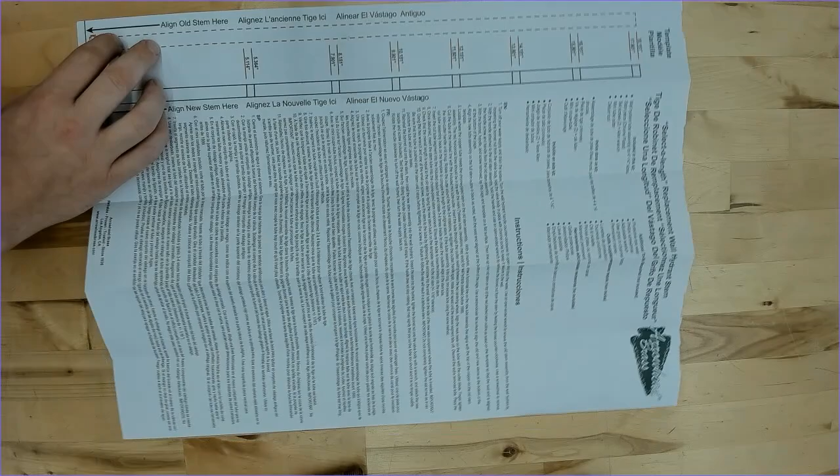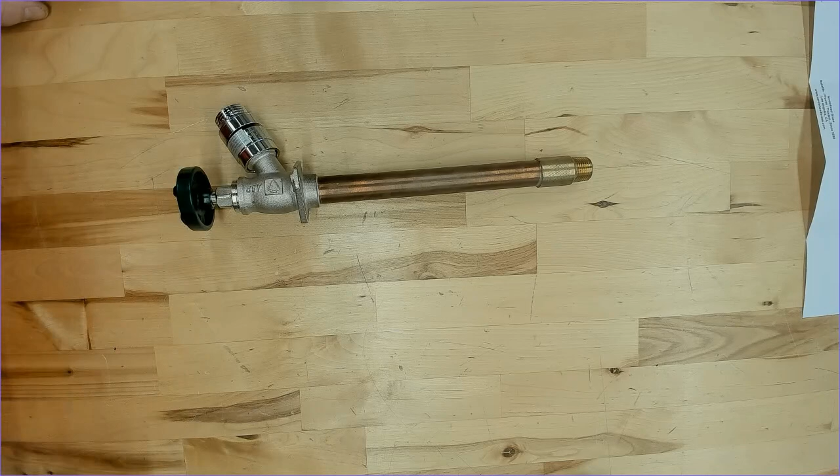Here's where you would line up the old stem and the new stem. So let's get to work. So we have a 480 series faucet right here. And we're going to start with taking off the handle. It is extremely important that you get the handle off. That way we can get the complete accurate measurement of the old stem. Now this is a new faucet, so it's got the new style stem, which means it'll have the single nut, not the double nut.

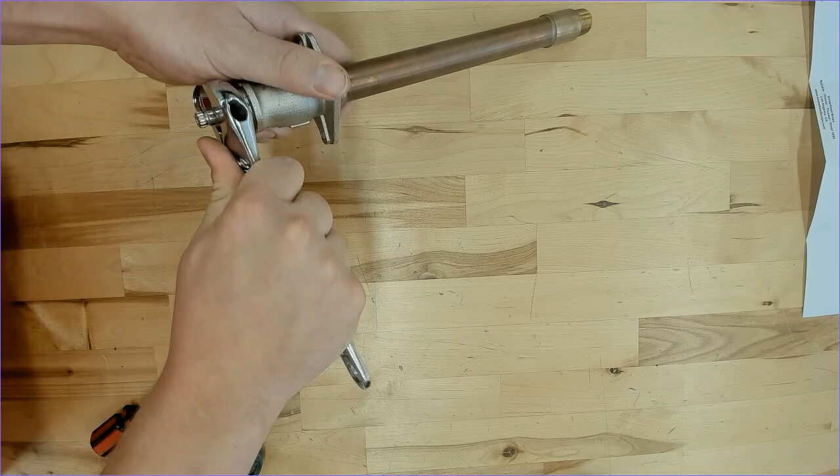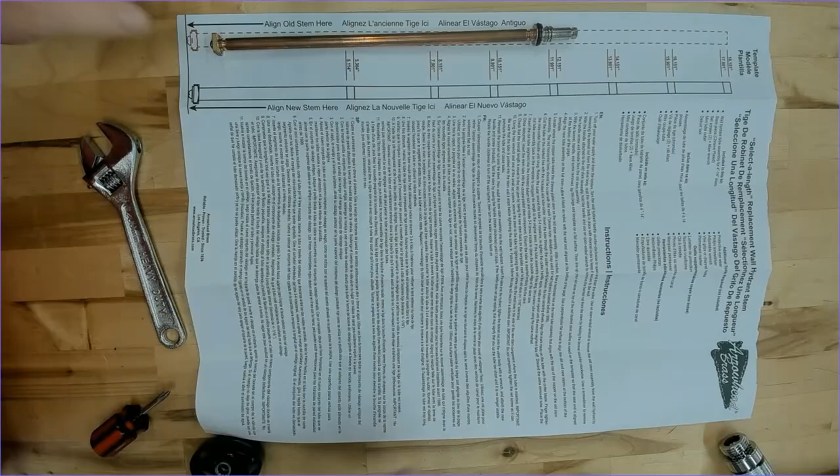Alright. There we go. Alright, so here's our stem that we're going to make. Set the faucet to the side, get our template. And we're also going to make sure that the bonnet nut is threaded off because we want to make sure that we get this measurement. Alright, so you want to line the squares up on the end right here all the way to the screw.

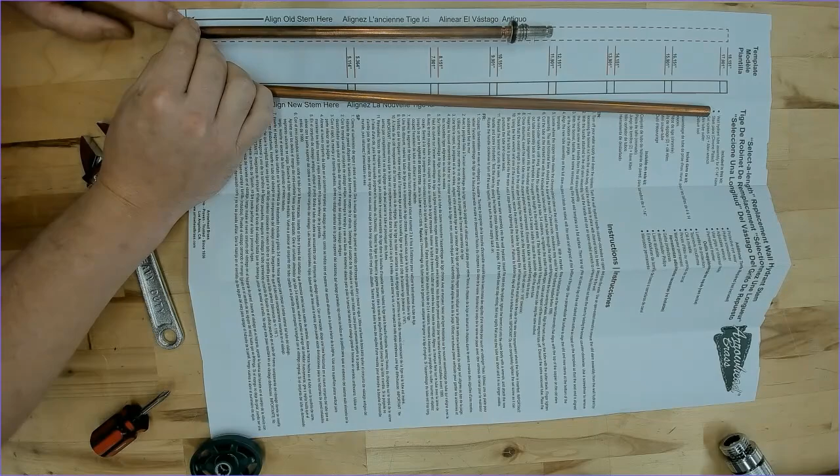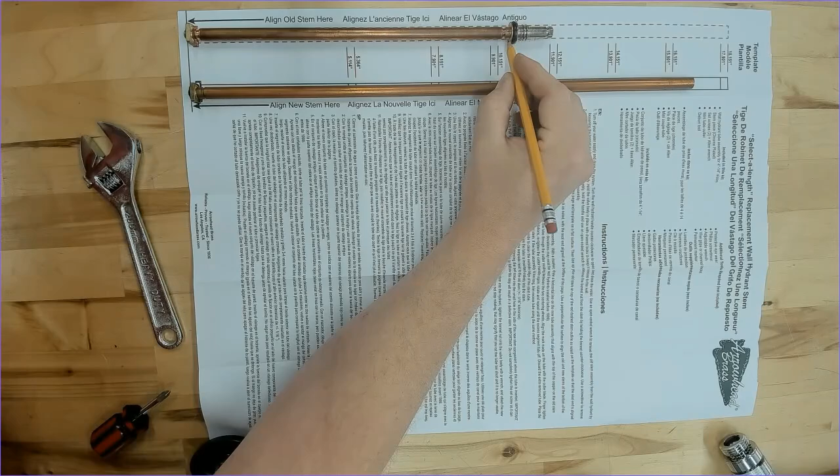Alright, so now that we got them lined up there, in the instructions it's going to tell you to use a marker to do this. I prefer to use a pencil just because you can easily get rid of that mark and make a new one if you need to. So if you have a new style stem, the lines are pretty much going to be kind of close, but where you want to get it is right here where the chrome meets the copper, right a little above it right there. So we're going to mark it about right there. Make a good mark, that way we can see it.

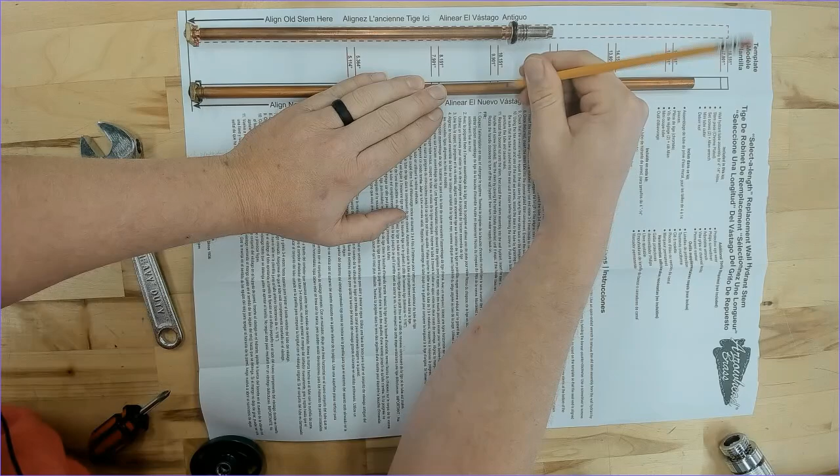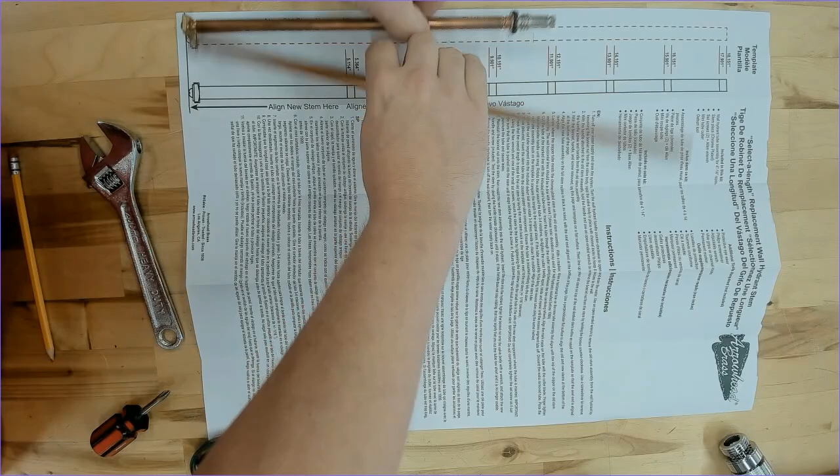Alright, now there is one other way to do this. So if you trust yourself, you can go ahead and do this, cut it. Another way that you can do it is like this. So if you take this side of the stem and bump it up against the chrome piece, and just make sure that it's on the brass. You line it up, and you'll see that it lines up right there. Now this method has been tested by many plumbers, and we actually kind of prefer it this way.

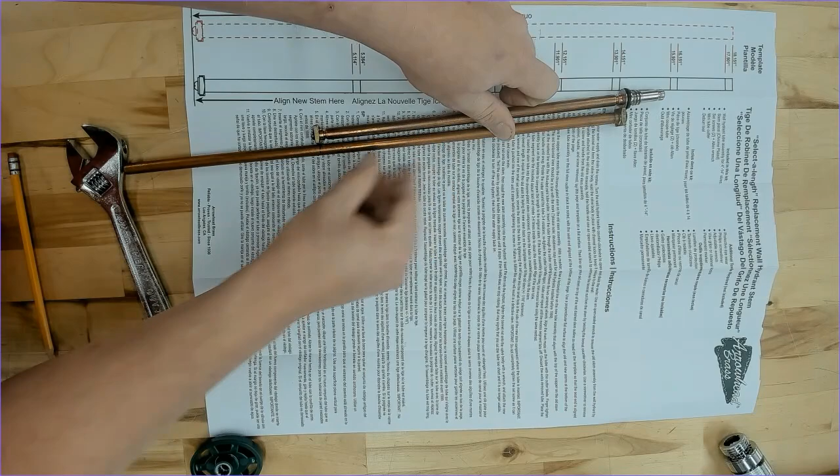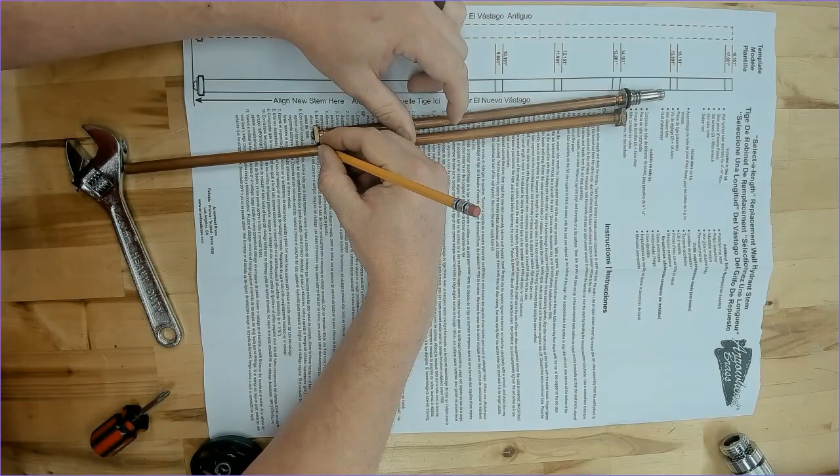So that line would actually probably work, but I'm going to actually erase that. I'm going to make it just a tad bit bigger. And that way the stem is just a little bit longer. Alright, now that we got our mark and we're pretty confident on the mark, we're going to cut the stem. So the way you want to use your cutter is you want to make sure that the pipe is laying between the groove here. So there's 2 wheels, you want it right in the groove right there. So then you're going to line your mark up with the cutter.

We're going to slide it in. And the way you want to do this is you want to get it tight. You just want to make sure that your cutter is on the mark. Just double checking. Alright, so now that we got it snug, we're going to do a couple rounds here, and we're going to tighten it up again. You want to make sure that the cutter wheel stays in the same groove as you go around. So that way you get a good even cut, and it looks good. Alright, so this does take a minute or two. So we're just going to try to hurry up and get this done real quick.

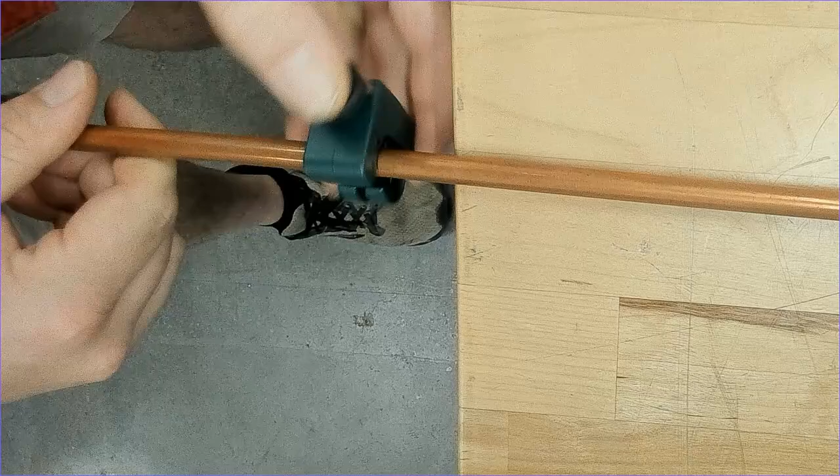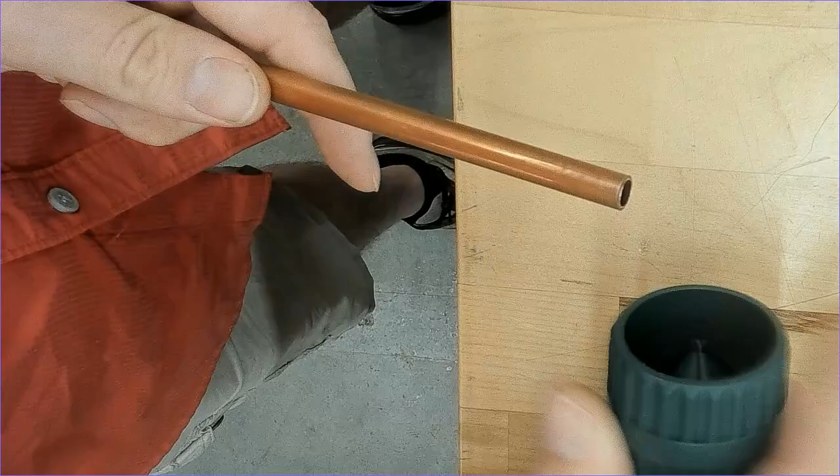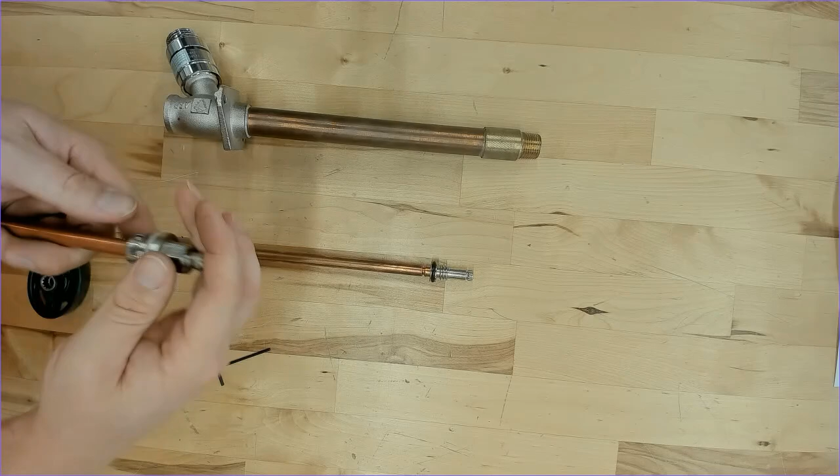So as you go, you'll see that the groove is going to get deeper. That's what you want. It means that the pipe is actually getting cut. There we are. Now that it's cut, we're going to use the deburr tool. We're going to deburr the inside and outside. So this is the deburr tool. We just want to make sure that there's no burrs or anything. That way our packing gland, when we put it in there, it doesn't get damaged in any way.

Alright, so now that we got it deburred, let's go put our packing gland on and put it in the faucet. Alright, now we're going to put the packing gland on the stem that we cut since we got it to the right length. So it just slides on, and you want to tighten up these set screws right here. There should be 2 of them. We already got them pre-started in there just because they're so small. We were afraid they were going to get lost here around the shop. And make sure they're tight.

Alright, now we're going to insert the stem into the faucet. Now, if your old stem had the double nut on it, you're going to notice that the new style square on the end is going to be bigger than the one you have. What you're going to have to do is you're going to take a metal file and you're going to have to shave about a 1/16 inch off of each corner of the square. So all 4 corners, just 1 or 2 hits with a metal file should do the trick.

So once you got that done, slide it in the faucet, tighten it up. That noise can be something. Sorry about that. Alright, so now we're going to get the stem tight. Alright, put our handle on. Make sure that everything is good. Alright, it is tight. She's sealed up, ready to go. And that's how you cut the stem for the SL14-ST stem kit.